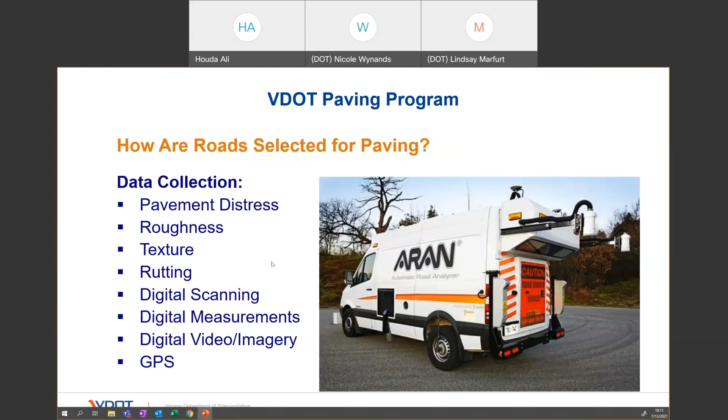Once the data is analyzed, every road receives a pavement rating. The rating is based on the Critical Condition Index, CCI.

The Critical Condition Index was first used by the Army Corps of Engineers, and we adopted it because we thought it was very efficient. The scale goes from 0 to 100, with 100 being excellent and 0 being extremely poor or no score.

So the goal for each road is to receive a sufficiency rating, which is pretty much equal to 60 or above. Any rating below 60 is in consideration for the paving schedule for the year.

To the right, you can see examples with photos of road ratings. It goes anywhere from the top one, which represents an excellent rating from 90 to 100. The next one is a poor rating, pretty much 50 to 59. And then the bottom is a very poor rating.

As you can see, we pave both asphalt and concrete, however concrete is not very common. And if you notice the color coding on the left, this will later be displayed on a map that we will show later in the slides. This is the same color coding used here.

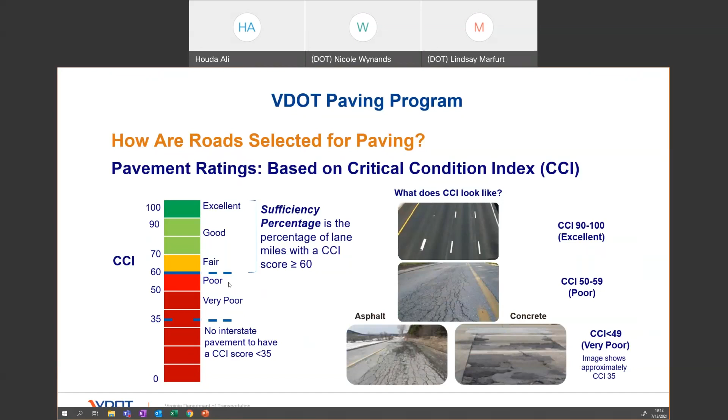When we do the data collection, the frequency for using these vans varies. For interstate, we do that annually, and for primary roads, we also do annually. For secondary roads, because the network is pretty large, we do 20% each year and complete the cycle every 5 years.

Also, beginning of this year, we added a subcategory to the secondary roads, basically roads with higher average daily traffic, higher than 3,500. For example, like Braddock Road, we start treating them similar to primary roads, meaning we are rating them annually starting this year.

Traffic volumes are also a big factor in determining our rating and our goals. For interstate primaries and secondary routes with high volume, like Braddock, our goal is to achieve 80% of the roads with a CCI score of 60 or greater. For low volume primaries, less than 3,500, the goal is 75%. For low volume secondary, which is pretty much subdivision streets all the way to a road similar to Telegraph Road, the goal is 60% for a CCI of 60.

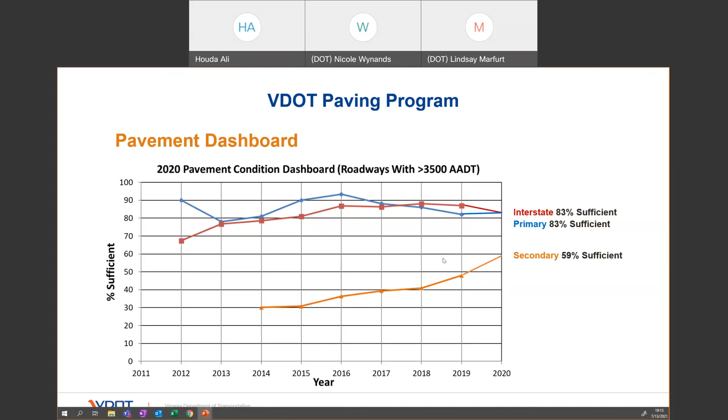There are different types of pavement treatment. There is preventive maintenance, which is pretty much crack sealing and patching. It's not very common, or even very efficient, so we don't do a lot of that. Our focus is more on corrective maintenance, where we use plant mix, which includes milling the top 2 inches and then overlaying 2 inches of surface mix asphalt, in combination with patching as needed. This is the most common treatment that we do for our roads.

Then there is the third treatment, restorative maintenance, where the milling goes a little deeper to the intermediate layer — from 2 to 4 inches — and then it gets overlaid with 2 inches of intermediate and another 2 inches of surface mix asphalt. And then there is full depth reclamation. This is very rare, and it includes basically excavating the whole pavement and rebuilding the subbase for additional pavement stabilization, followed by 2 to 4 inches of intermediate and surface asphalt mix. It's pretty expensive, and we apply it only on roads that are in very, very bad shape.

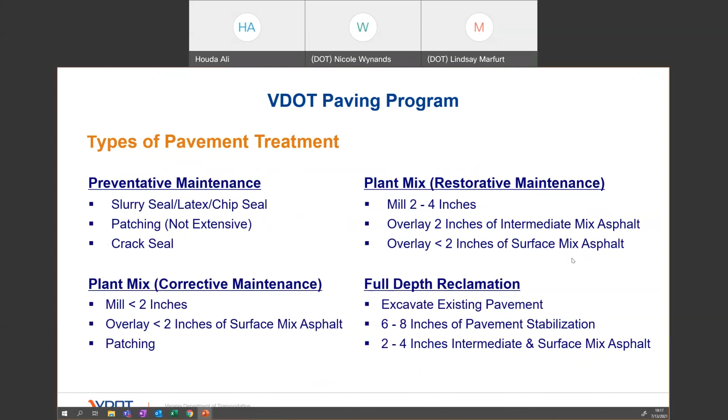We do have online resources available for public viewing on virginiaroads.org. There are a couple of mapping resources available. One of them is the pavement condition map, where the data that gets collected gets displayed on this map. If you go to this map, you can enter an address and see the pavement condition rating for your street. To the right, there is the color coding that we saw earlier on the rating slide.

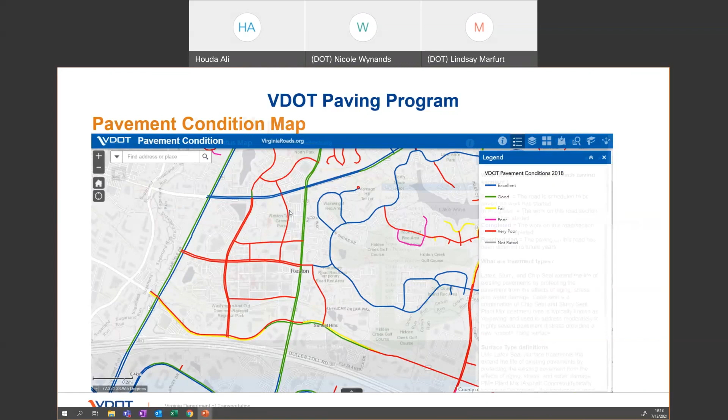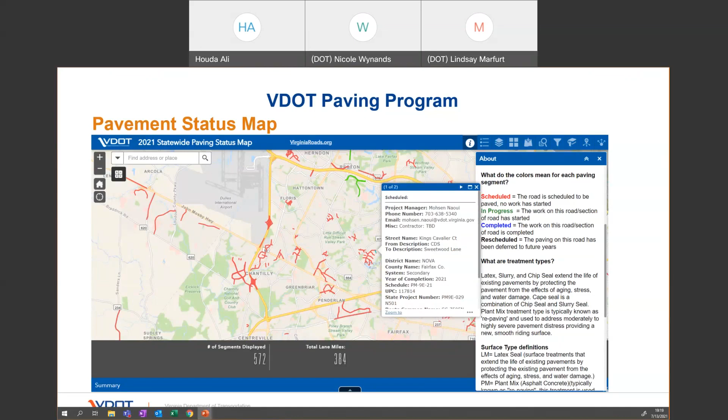The other map we have is the pavement status map. The 2021 pavement status map is already posted online because paving is in progress. You could enter an address and zoom in. If you right click on the street or address, you'll see information related to the project, including the project manager information, contact numbers, email address, the name of the street, schedule information, and so many other details. Also to the right, you can see the legend for the map.

As part of paving, we also do marking and striping. Those fall into 3 categories. There is typical pavement marking under the contract, which covers replacement in kind — putting back what was originally there. However, in some occasions we may add minor improvements like adjusting a crosswalk or adding an edge line. The second type of changes may include improving safety or operational needs.

That will include lengthening a turn lane or even creating a new turn lane, depending on the need for that location. Lastly, we coordinate with Fairfax County DOT to seek opportunities where pavement markings could be changed during the repaving operation to enhance the on-road bike route networks — whether through shared lanes, standard bike lanes, or buffered bike lanes — and also to coordinate on planned pedestrian safety improvements, like adding new crosswalks. The county team will talk in more detail on that subject.

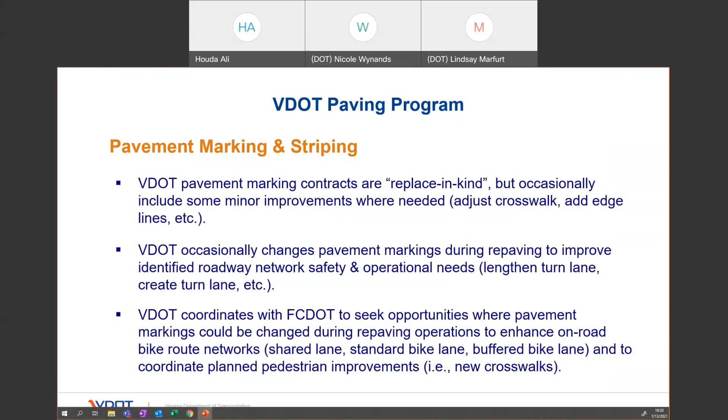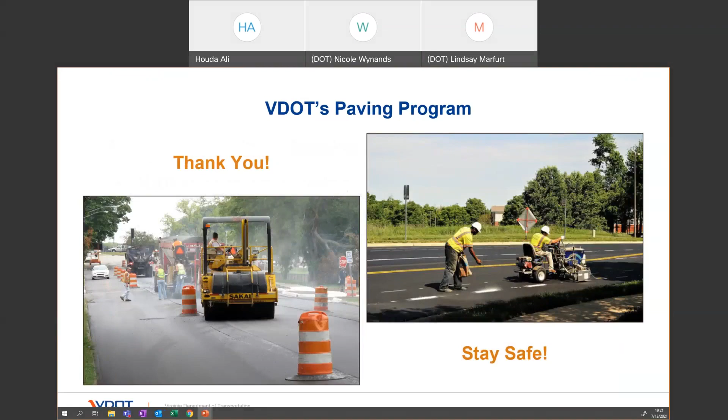Great, thank you so much, Houda. Let me switch to my screen now. Thank you, Nicole. So, Nicole, you should be able to present now.

Yeah, it still says that your copy is open. Sorry? Oh, there we go. Oh, yeah. Sorry, WebEx wouldn't let go of the PowerPoint. There we go.

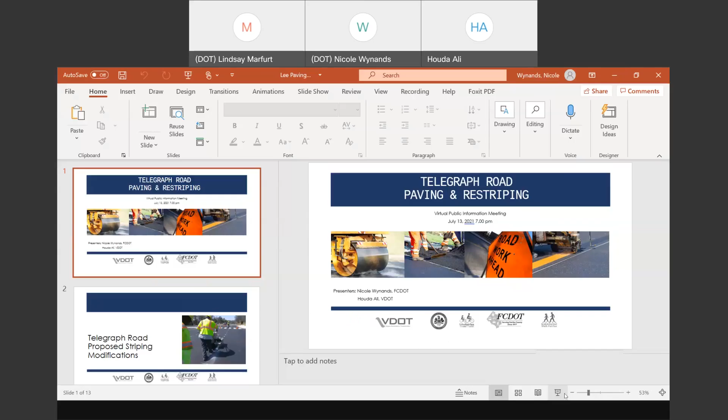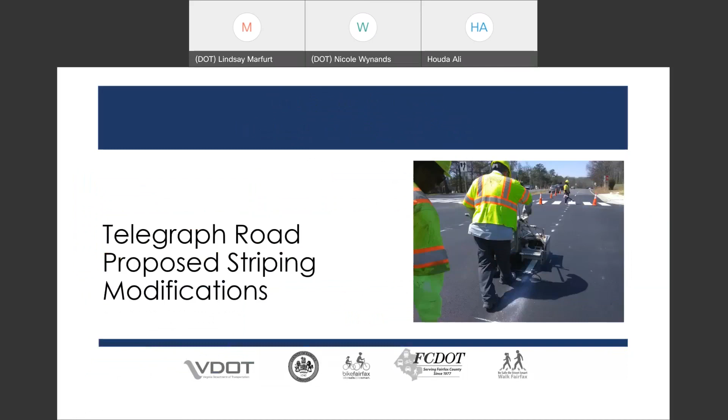All right, so now that we've covered a little bit of how we got here in the first place, VDOT's paving program is giving us the opportunity to revisit the current striping on Telegraph Road. So I'll cover some of the thoughts behind some of the recommendations we have for this stretch of road.

But to take a step back, the county and VDOT are coordinating through this paving program to primarily implement the county's comprehensive plan. So we screen all the roads for potential striping changes that are recommended in our comprehensive plan, but also additional safety improvements outside of the plan or the planned network. The reason for that is because we have a blank slate to start with, so we have some flexibility in how the stripes go back.

If we were to do that as a capital project, as a county, it would cost a significant amount of money because we would actually need to repave the road ourselves in order to even change the striping without major damage to the existing pavement. So doing it through this process comes nearly at no cost. It's a very insignificant cost in comparison. So it's a good opportunity to make sure that the striping is as safe as it can be.

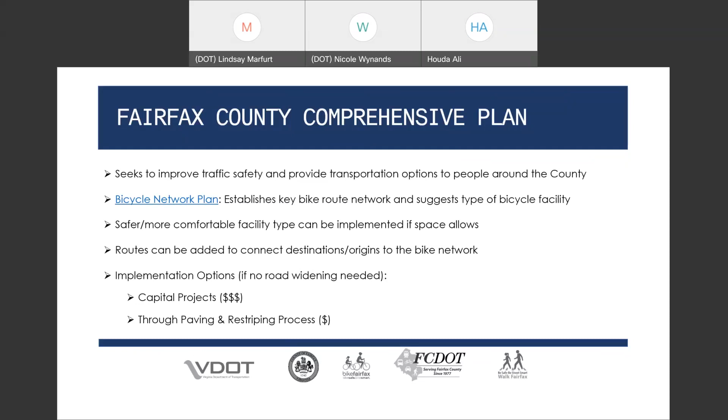And if a bike lane is there and it's fairly connected, or they'll just have to go down a couple blocks on the bike lane, enthusiastic and confident cyclists, which is about 9% of the population, would still use that bike lane. So it's not ideal, it doesn't serve everyone, but it does serve bicyclists that are currently using the road already, or are interested in a safer way of using the road and would be okay riding on the road next to traffic.

So for other cyclists that need a little bit more protection, a little bit more caution, that's what we do capital projects for. We would build a shared use path or separated bike lanes, but those come at a pretty significant cost, about 10 million per mile currently. So that's something that's more of a long-term vision for Telegraph.

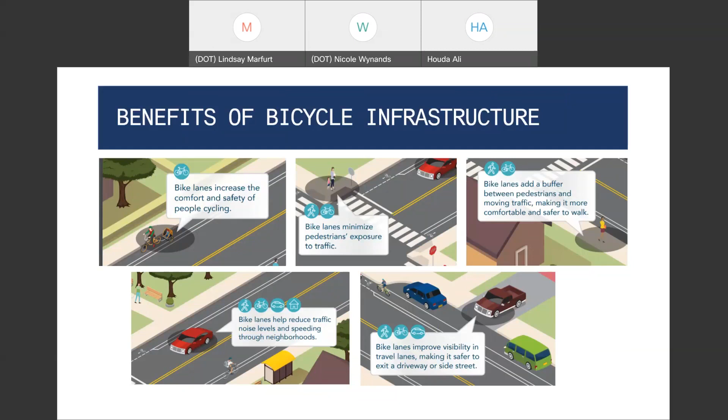And you do have some driveways along the stretch of Telegraph. If you have a bike lane in front of your driveway, it will help improve your sight distance. You don't have parked cars here, but the sight distance is still improved looking left and right for cars, because the cars are pushed away from the curb a little bit. That helps increase visibility for people trying to get out of the driveways.

So here's an example of this traffic calming effect that I mentioned. This is Annandale Road. You can see how it looked before on the left. And just by narrowing the travel lanes to a standard travel lane - on the left, it's excessively wide, which can lead to speeding because drivers have a lot of room for error and may not need to pay close attention.

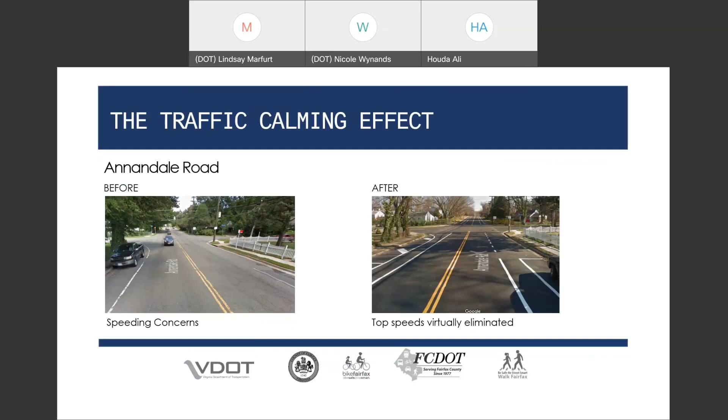The road on the right, it doesn't have any impact on traffic flow, but it looks a little bit more narrow and makes drivers have to pay more attention to make sure that they stay between the lines, and it helps slow down the top end speeders.

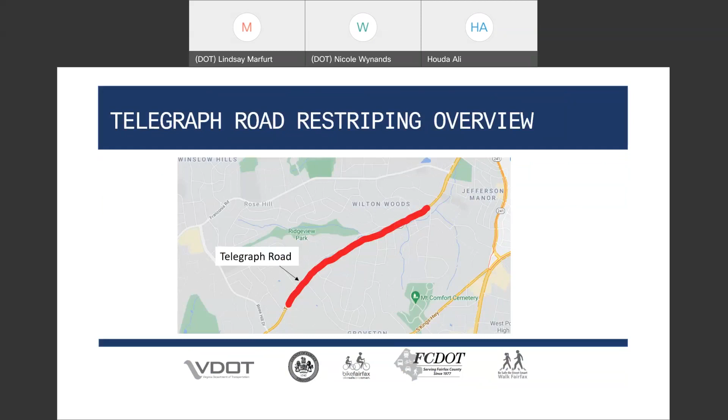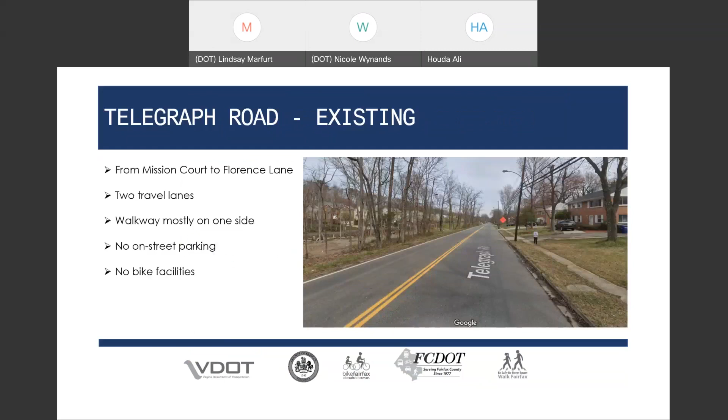And what we're proposing here is just to add this one stripe on the right that would give us a bike lane along the curb going north, which is about a 4-foot bike lane, and then have a shoulder on the other side by narrowing the travel lane a little bit to a standard travel lane. It's currently very wide.

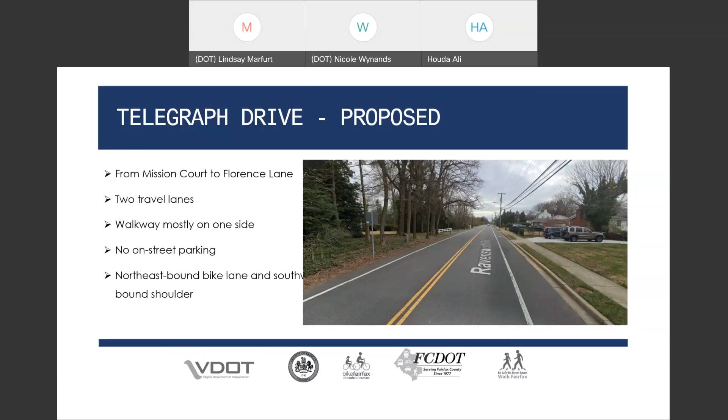And it's unfortunately not enough space to actually stripe it as a bike lane, so we're missing maybe a foot or 2, but it's still an improvement, both from a traffic calming standpoint and safety standpoint, but also if a pedestrian would want to walk there where there's no sidewalk, or a cyclist would like to ride closer to the curb, it increases the comfort level a little bit.

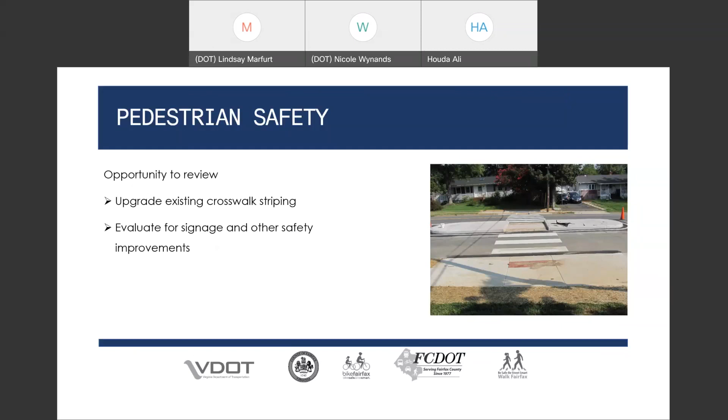And we're also looking at pedestrian safety improvements. So there are a couple of crosswalks along Telegraph in this stretch that we can upgrade the striping as part of this to a high visibility crosswalk, and also evaluate for other safety improvements. And that's something we would love to hear your input on as well. Is there a specific crosswalk that is in need of an additional treatment in the future when funding becomes available? And so we can add it to our list of future improvements.